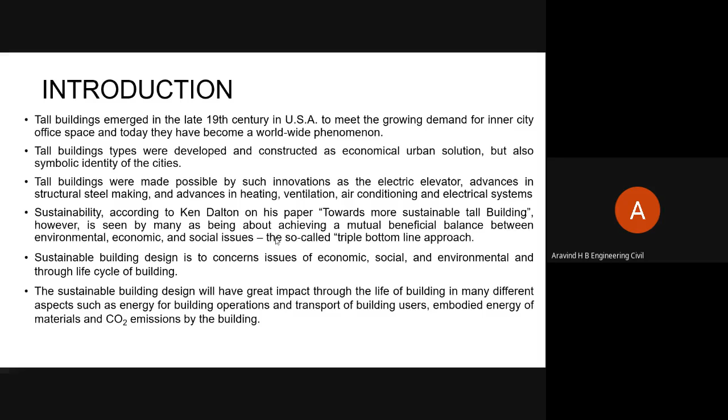Now, we also hear about green buildings, and they're more of a sustainability trend. What exactly is that? Many architects now agree that we are looking at having greener buildings, and even clients agree that they want economical and environment friendly buildings.

And one good thing that has happened now, after a long time, is that the government has relaxed rules so that timber can be used in construction, and farmers can grow timber commercially for this. This is a very important step. If you look through all our ancestors, whatever they have done, they have basically used timber. They were very friendly with nature.

Now we have brought in all kinds of things like steel, concrete. Now we are even going further. We want to bring in all kinds of smart materials also here. So all these things are happening.

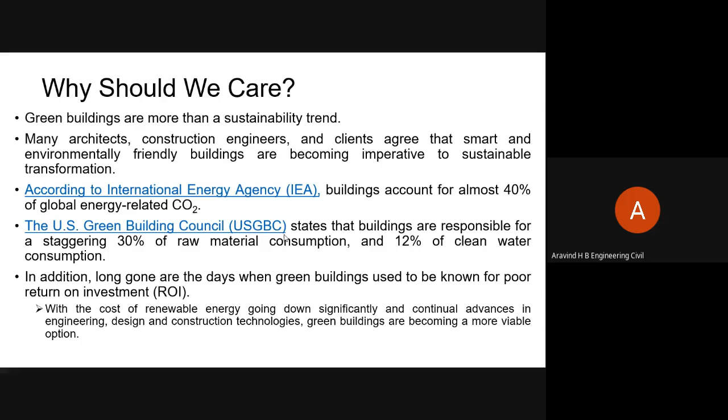So how do we take care of all these things? Say that we want the building to be green, we want it to be sustainable, but at the same time I want to use the latest technology. I want a humidified atmosphere inside my tall building. I want an excellent air conditioning system. I want fast elevators inside. So how is all this possible when you have these constraints?

If I look through this, a simple question: what is a green building? According to the World Green Building Council, it is a building that is designed in its construction and operation to reduce or eliminate negative impact and create a positive impact. Now, if you look through this, you have energy, air quality, material, site, water. All these things are contributing to your development.

And when you are trying to do that, I must not disturb the land, I must not disturb the water body around that. At the same time, I must not play around with the energy around us. So if I have to do that, then I need a healthy, comfortable, durable, energy efficient, environmentally responsible building. I need to look into it from a different angle.

That means I should be efficient in using energy, water, and other resources. Just now, Pravinjit pointed out that the water bills are shooting up. That's what happens when you stay at home with no control on how water is being used. See, even every drop of water matters to us.

Now, look at ourselves. We are now running around to get drinking water. I don't know how long the Kaveri can supply water to the state, to Bangalore city and surrounding areas, because if you really look, the Kaveri has not touched the ocean for a fairly long period. I don't know how many of you are aware of it. About 430 kilometers of that river has dried up.

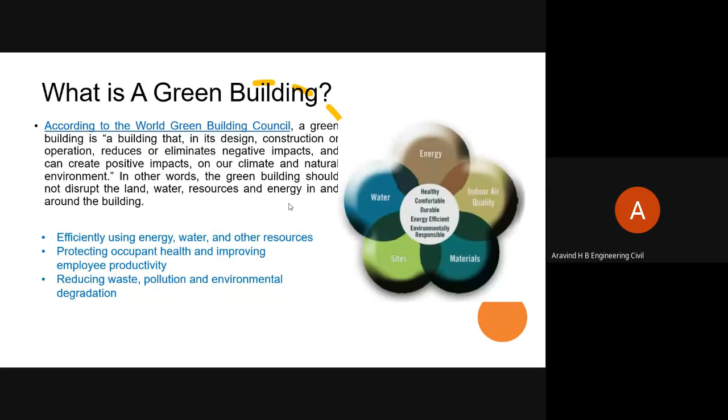So if you look into all these things, then probably you can find a way how best we can reduce the negative impact of whatever we have been doing. That means reducing the waste, trying to bring down the pollution and also trying to reduce the environmental degradation. So what is sustainable development? What exactly does it mean? The Brundtland Commission was the one which gave the meaning for this. It said development that meets the needs of the present without compromising the ability of future generations to meet their own needs. This is a questionable one.

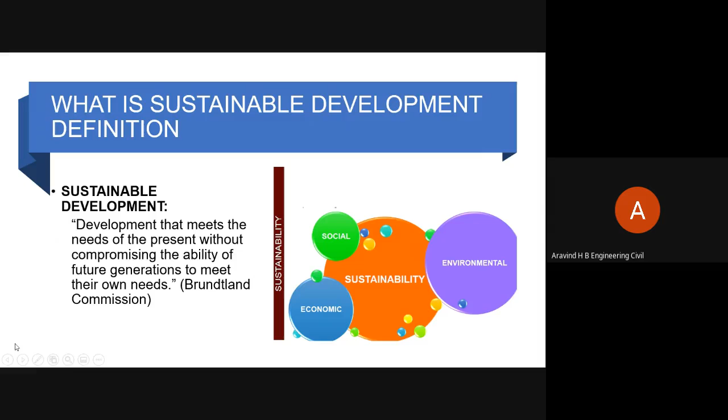If you look through our country, we have already depleted the environment, or we have depleted the natural resources. So our future generation, I don't know what they're going to get. That is what it is. So if you look at it, it has three important factors to it. One is the economic, the other one is social, and the environmental. All these three play a role in making something sustainable. So when we look at it, we have to make sure that anything that we choose will be sustainable.

Now, don't get me wrong, I'm taking steel as one of the things because, when compared to concrete, it's slightly better in terms of being environmentally friendly. So, with steel, 40% of resources come from recycling. The manufacturing conditions, the process, and a controlled environmental impact. Material durability is there, and you have a high recycling rate.

Now, you can ask a question: can concrete not be there? Yes, it is possible, but we have not had any kind of sustainable work in terms of recycling the aggregate, recycling something. Cement, once it is used, I cannot recycle it. It's gone forever. And if I have to produce cement again, I'll be emitting carbon dioxide into the atmosphere.

So if you look at the construction phase, now look at COVID, how you have social restrictions. You need to have a certain distance between the workers. We need to have a certain distance between the engineers and the workers, and you need to maintain a certain distance between all these things. Under such circumstances, probably prefabrication and steel is the solution for us, and what is called off-site manufacture. This is very important. Probably going forward, we may be looking more towards steel and prefabricated structures.

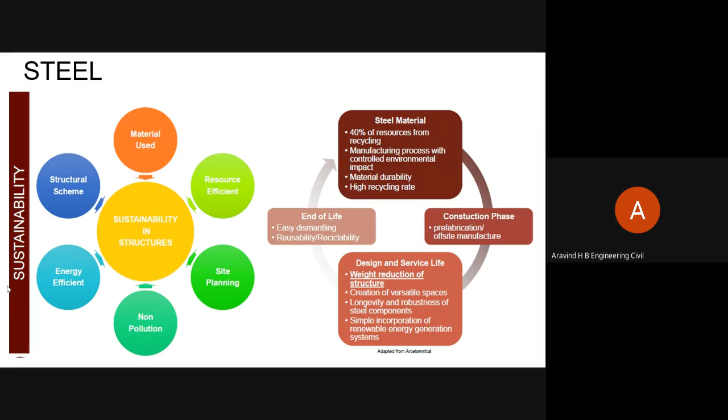Now, at end of life it is easy to dismantle and reuse or recycle. So steel plays an excellent role in sustainability. Now, if I look at the structural scheme, the material used is resource efficient, site planning can be efficient, energy can be used efficiently. I can come up with an excellent structural system for that. It's non-polluting. From all these angles, steel appears to be a good one in the present situation.

Now, when you look at sustainable tall buildings, what are the design criteria that you have for this? There are three heads. We'll discuss them, then we go into different criteria. One is ecological sustainable design. What does it require? It requires a sustainable site, water efficiency, energy and atmosphere, and materials and resources. Then you have economical sustainable design, which is the efficient use of resources and low operating cost. And socio-cultural sustainable design has indoor environmental quality and innovation in the design process.

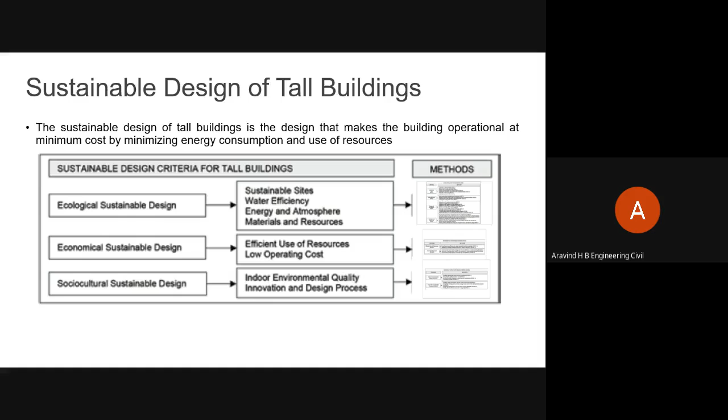Now, if you look at the first one, ecological, what are the design criteria that you have? Sustainable site. I'm going through the basic things. It is protection of the natural habitat, improvement in urban areas, effective use of the construction site, creation of transportation and parking systems, selecting land appropriate for the residential density, protection of fertile soils, reducing the heat island effect. All these things come under sustainable site.

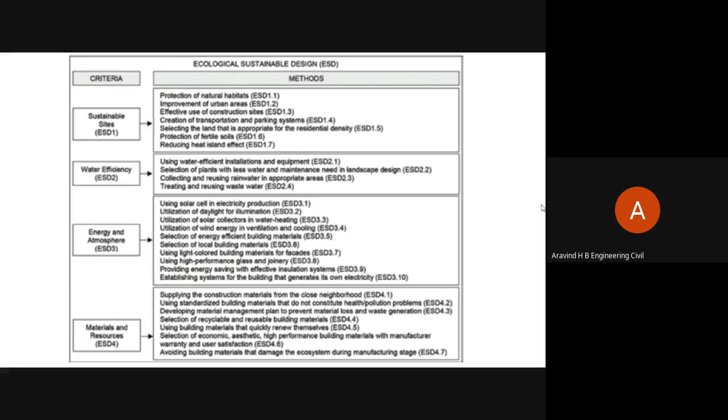Then you have water efficiency. Then you have energy and atmosphere efficiency. Then you have material and resources efficiency. All these things are addressed. So you will have various sources now available to meet your ecological criteria.

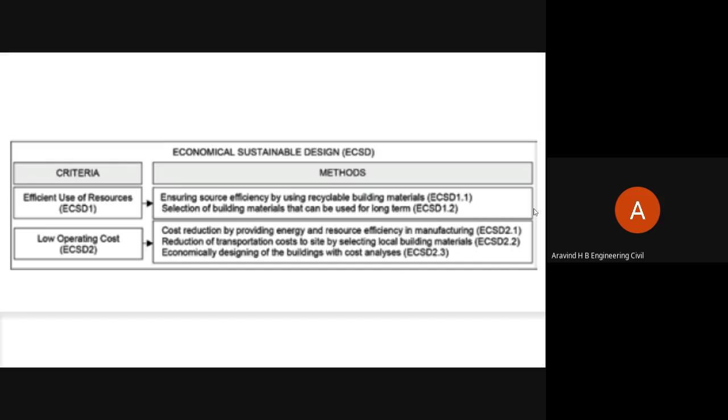Then you also have low operating cost, where you provide energy and resource efficiency in manufacturing, and you have reduction in transportation costs to the site by selecting local building materials, and you're economically designing the building with cost analysis. Then the socio-cultural one, the third criteria: creating the appropriate indoor comfort condition.

If you look at our ancient buildings, or go to any village, or look at the buildings in old areas of Bangalore, some of them are still there. Even my ancestral house is still there. You can see the comfort that you have. We never had a fan or a fridge till 1980 in our house. That's how the interior of the house was. Even in summer, we never felt the heat, and in winter, we never felt it was so cold inside. It was so comfortable. That is indoor condition.

But unfortunately now, with so much development taking place around our house, it's no longer like that. We are forced to use these things. So this is what is changing everything. So then, ensuring the quality of indoor air, yes.

As a child, I do remember the kind of surroundings that we had and the kind of atmosphere we had outside; we used to climb trees, play there, and all sorts of games. But now it is virtually impossible to do that. And we lived with nature. There were a lot of snakes and other animals around. So we were part of it, and every day we used to watch them. That's how it was. We were so friendly with nature, but later on we lost that contact.

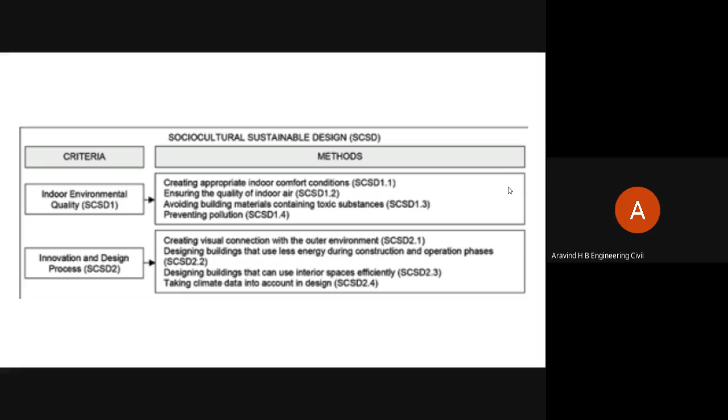But how far are we using it? Now, the question that comes to your mind is, okay, all these things existed. Have we used them anywhere? Is there any tall building which is sustainable or has followed the sustainable design criteria? There are a lot of buildings which have followed this. I have taken two examples. So let me tell you.

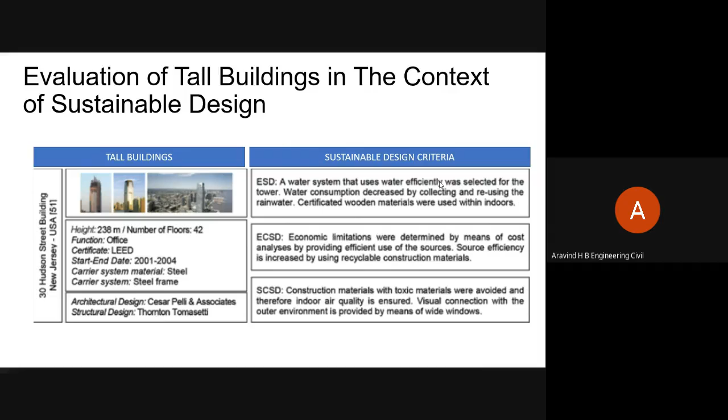Now, is it possible to make every building sustainable? Yes, it is possible. All tall buildings can be made sustainable. Now, let's go through the challenges of Taipei 101.

Till Burj Dubai was built, this was the tallest structure. This is in Xinyi district of Taipei, and this is owned by Taipei Financial Center. It has a multi-level shopping mall adjoining the tower that houses hundreds of stores, restaurants, and clubs. Now, if you look through this, the social environment of this, it has a mall, it has houses, stores, restaurants,

and clubs. You have water consumption, then you need to have some kind of an air conditioning system inside, and also you need to have some way to see that the atmosphere within that is suitable for the human environment. So automatically your sustainability comes into play. What did we do here?

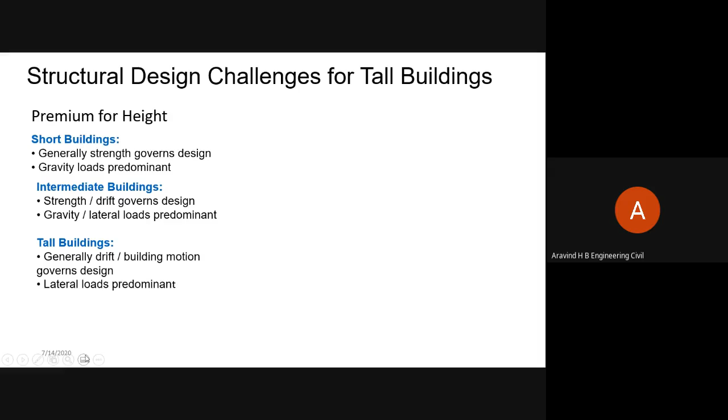First, for a short building, if you look at the structural design aspect of it, generally your strength governs the design, and gravity load is predominant. When it comes to the intermediate one, your strength and drift govern, and gravity and the lateral loads also to a certain extent. But when the building becomes tall, drift, the building motion, governs the design, and lateral load becomes predominant.

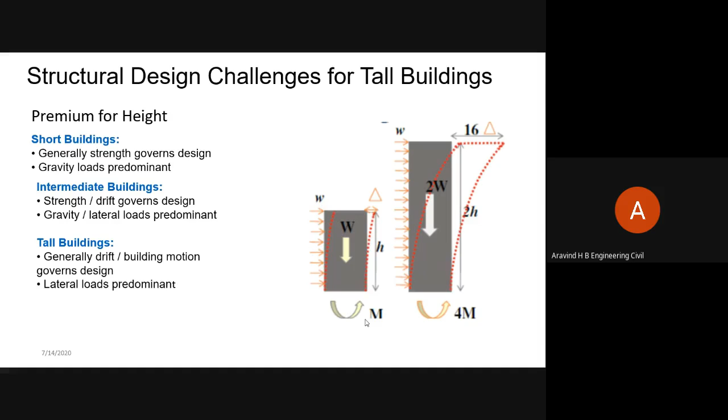So I can just give a simple example here. I just have a height of the building H. Weight is W. It has some wind forces acting on it, and there is some base moment. Now, if I double the height, I can see that the drift is multiplied almost 16 times, and your base moment increases almost 4 times. So you can see the impact of the height of the structure on the base moment as well as the drift.

So height was the major factor that we had here. When we started the design, it was not supposed to be a tall building. What was needed was to support the floors, shafts for the elevators, space, stairwell space, space for mechanical, electrical, plumbing, and fire, etc.

Now, what happened was when the Petronas was built, the people at Taipei Financial Center said, why not make this also tall? Once you have to make it tall, your economic height is decided by the rent that you get out of the floor. That means the rent of the added floor should be greater than the cost of the added floor.

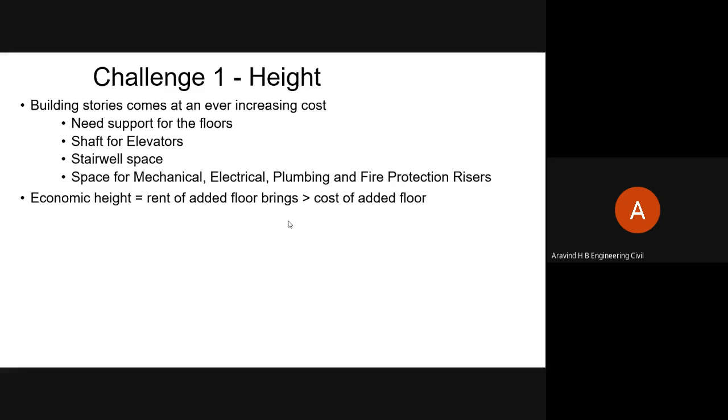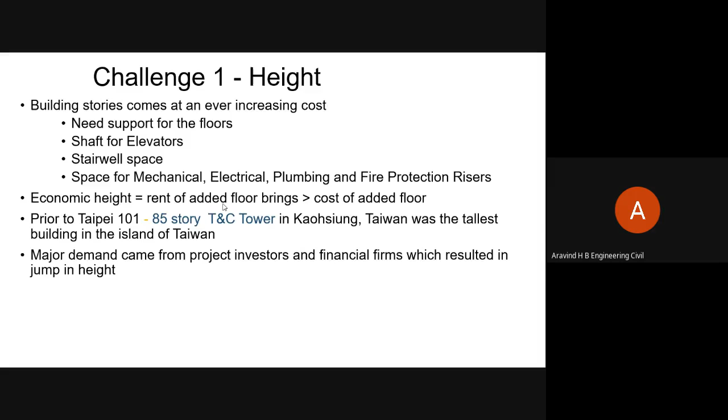Also in Kaohsiung in Taiwan, that's another town, there is the 85-story T&C Tower that was the tallest building on the island of Taiwan. Now, the major demand from the project investor was that they wanted this to be the tallest building in the world. So its height got increased. And the projected office space was 200,000 square meters, and based on the individual floor area and general office layout as per the standard, that led to the 101.

Now, this is generally what happens in design. When you're doing something, something else gets added on because somebody gets the idea, why not make it this way, and somehow finds an investment for that. So what happens is your criteria will change. Now, how are we going to address this?

The height has increased, and this region is prone to typhoons, this region is prone to earthquakes. At the same time, I have to keep all the other costs within reasonable limits, and at the same time meet the standards of LEED. What to do?

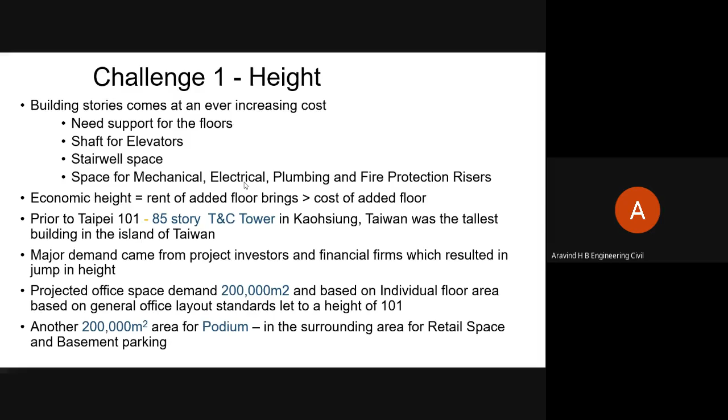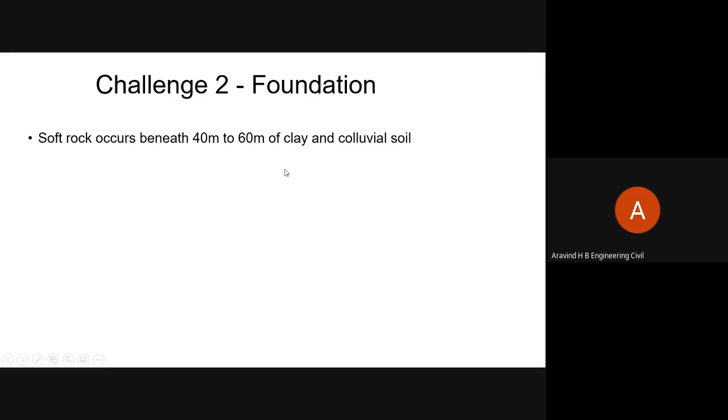So they added another 200,000 square meter area for the podium surrounding the retail space and the basement parking. Next, the second challenge was the foundation. There is soft rock beneath 40 to 60 meters of clay and colluvial soil. Groundwater is 2 meters below grade, and an extensive investigation was carried out by Sino Geotechnology, based in

Taipei. So based on that, we said we'll have a slurry wall, 1.2 meters thick, surrounding both towers and the podium. It's 47 meters in depth, cuts off the groundwater and provides embedment varying from 21.8 to 23.5 meters. Each podium column bears a single 2 meter diameter drilled pier socket, 5 to 28 meters deep. The podium slab has the buoyancy effect, so to prevent that we have the necessary dead load on it. That's the way the podium slab is resting. I'm not getting into too much detail on the foundation aspect.

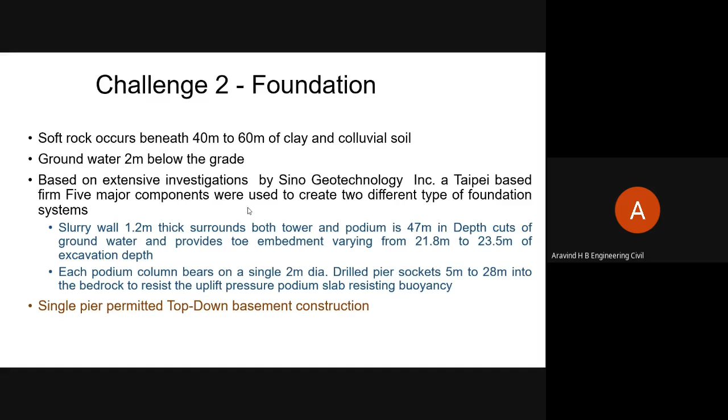Next, we have a single pier that permitted top-down basement construction. I hope you know what top-down basement construction is. Top-down means I don't start from the foundation. I start from the roof, then I go down, and finally I build the foundation. What was the advantage of this? The mall could be opened much earlier than the tower, so that the investors can get a certain amount of revenue from the mall. That's the reason why we resorted to top-down construction.

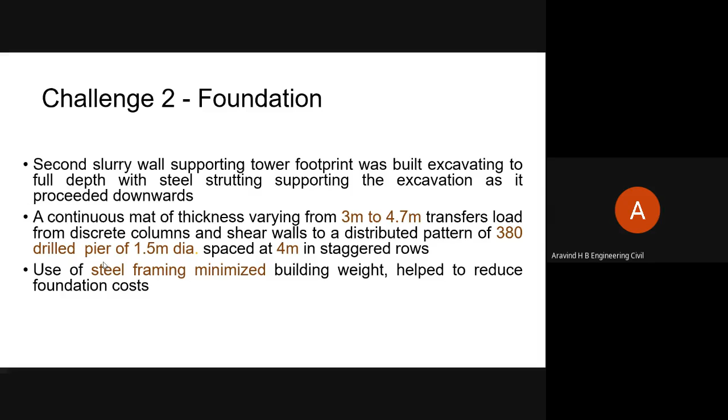And then you have a mat thickness varying from 3 to 4.7 meters that transfers the load from the discrete columns and the shear wall to the distributed pattern of 380 drilled piers of 1.5 meter diameter, spaced 4 meters in a staggered row. We have used steel as the main frame system, but we have used concrete also within this; it's a composite construction. The advantage is that the cast floor braced the perimeter wall, and the story excavation was carried out beneath the slab while the superstructure framing was erected above the slab at the same time. So both works could go on simultaneously.

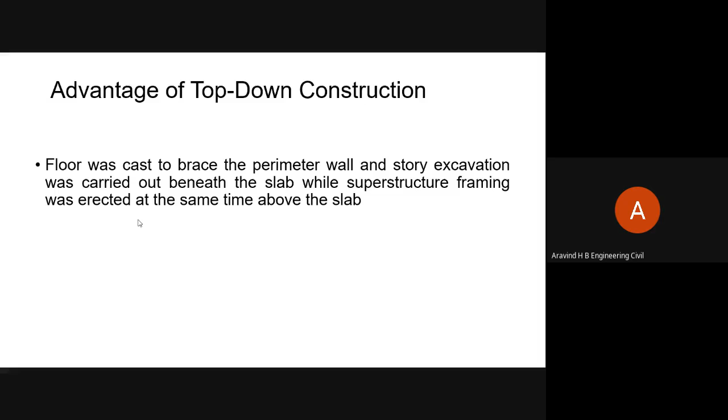Now, as I said earlier, steel always comes from a shop, cut to size, already machined. It comes from the fabricator shop, is brought here, and is assembled here. So the construction would be faster. Second, the podium could be opened a year before the tower so that the space is available for them to rent out and earn on their investments.

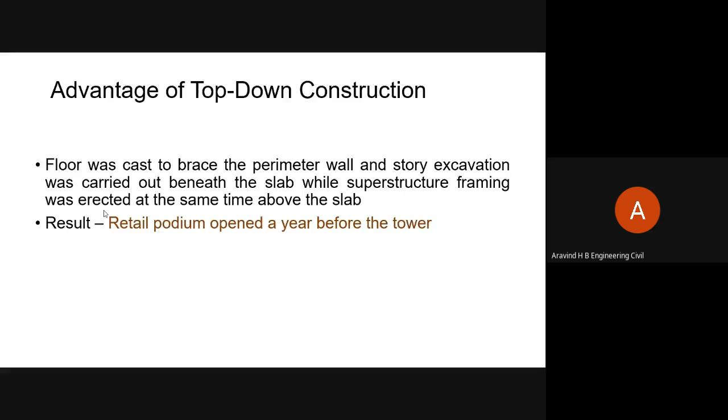Next was the tower shape. C.Y. Lee is the architect, and he is very well experienced in designing tall towers. He came up with the shape of a pagoda, something which has a narrower base and a wider top, with repeating modules. 8 is a very auspicious number for the Chinese, so everything was at 8 floors or 8 modules. It's a homonym with wealth. That's the reason why it has 8 modules.

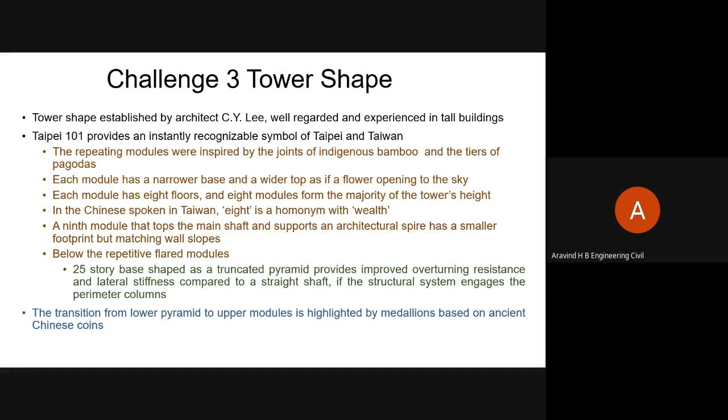The 9th is the top shaft, an architectural spire, and below that there are repeated flared modules. The 25-story base is a truncated pyramid that provides stabilizing, improved overturning resistance and lateral stiffness compared to a straight shaft. That's why we went for a pyramidal base, and it engages the perimeter columns. Also, the transition from the lower pyramid to the upper module is highlighted by the medallion, a representation of the ancient Chinese coin.

It provides large foliage during its growing life and is quite strong with predictable support. From this we got an idea, and we noticed that bamboo is able to sustain typhoon and behave very effectively and efficiently against lateral load.

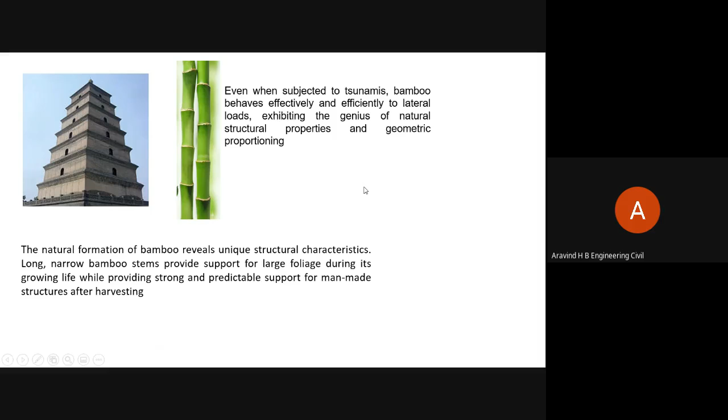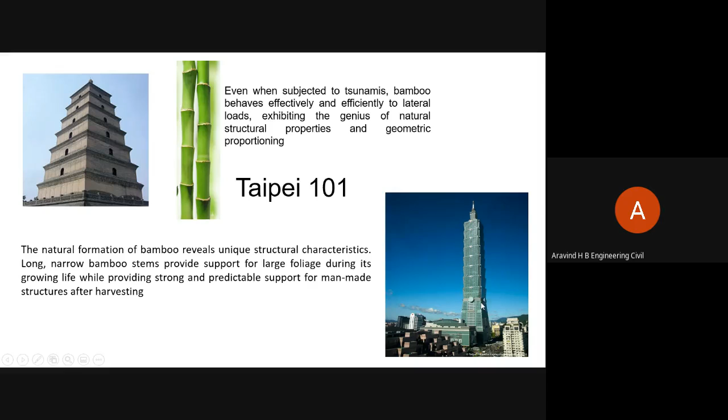So the final configuration of the tower is decided based on the wind tunnel test. Over this you have a spire going up, and below that you have 25 stories. This is the pyramid, a truncated pyramid.

Now, if you look at the wind, it has static, dynamic, and aerodynamic effects. In case of a tall building, in addition to the static, we need to consider both dynamic and aerodynamic effects, and these play a major role.

So to understand the behavior of the structure, I need to know fluid mechanics and structural mechanics, because there is an interaction between the two in the wind flow. That's why we carry out the wind tunnel test, to understand what kind of flow is there around the shape we have generated. Based on the wind tunnel test, we can modify the shape.

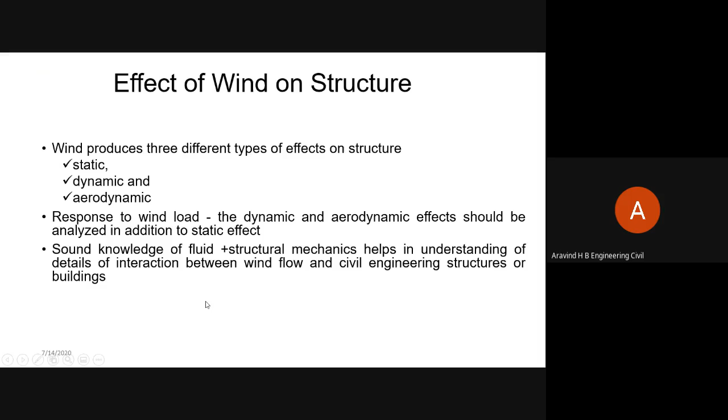As you know, the taller the building gets, the more the dynamic response starts to dictate your design. If you have a load, it can be broken down into two components: one is a static component, the other is a dynamic component.

That depends on the frequency of this fluctuating component. If the frequency of this fluctuating component coincides with the natural frequency of the structure, it can get into resonance, so we have to be careful analyzing this. We need to analyze both across and along wind effects, that is, the yawing moment also has to be taken into account.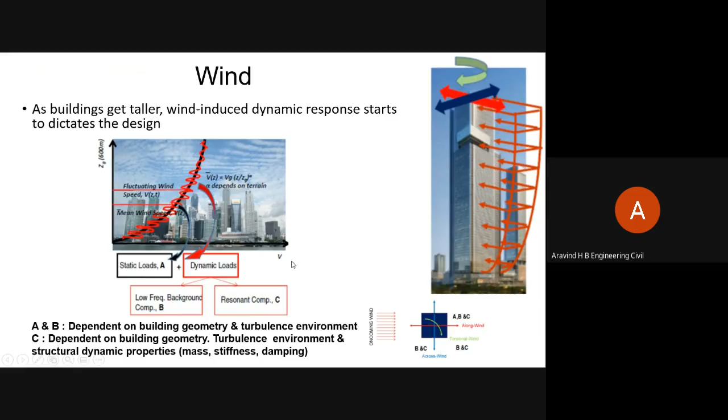Okay, how do I counter the wind? Probably you would have seen a coconut tree swaying in the wind. It sways, then comes back, and sways again in the other direction. That is because of the vortex shedding that happens around the coconut tree.

Skyscrapers also experience the same alternating crosswind forces due to vortex shedding. The wind passing through the object separates from the side face, creating alternating whirlpools that exert a difference in pressure on the building, making it sway. Pressure on one side will be lower and on the other side higher, which makes the building sway in a particular direction.

In Taiwan, the typhoon of a 100-year return period brings 43.3 meters per second, or 97 miles per hour, averaged over 10 minutes at a height of 10 meters. This can be similar to a 3-second gust of 67 meters per second, or 150 miles per hour. That is the typhoon you can expect here, which can excite a skyscraper, and the crosswind forces become much greater than normally used for design.

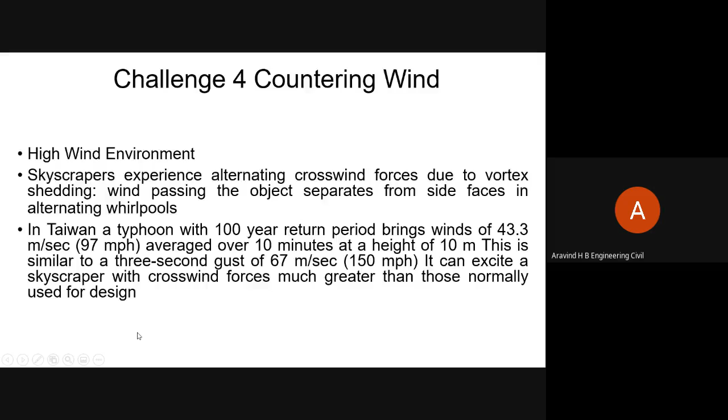So how do we minimize the effect of crosswind? There are several approaches. One is orientation, then you can create a setback and a varying cross section. This is what we have done in Burj Dubai.

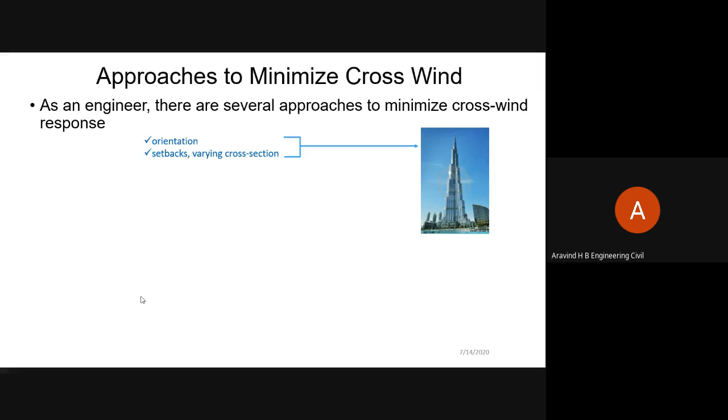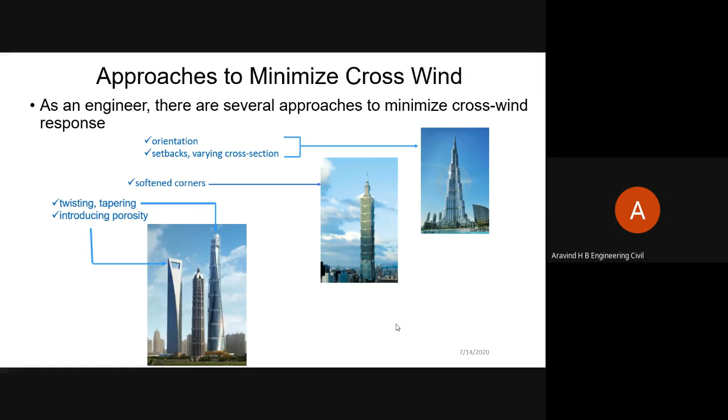You can also create a twisting structure and introduce porosity so that the vortex effect can be reduced. The other approach is having a softened corner, as in Taipei. These are some of the approaches generally adopted to minimize crosswind effects.

This is a wind tunnel test where a crosswind around the chamfered 45-degree corner reduces the lateral response. You can see this was the earlier response, and subsequently how the moment got reduced at the base. This effect is because of having a saw tooth or double-notch corner, which brought a dramatic reduction in the wind moment. That's how the shape got changed to this, with the double-edged notch here.

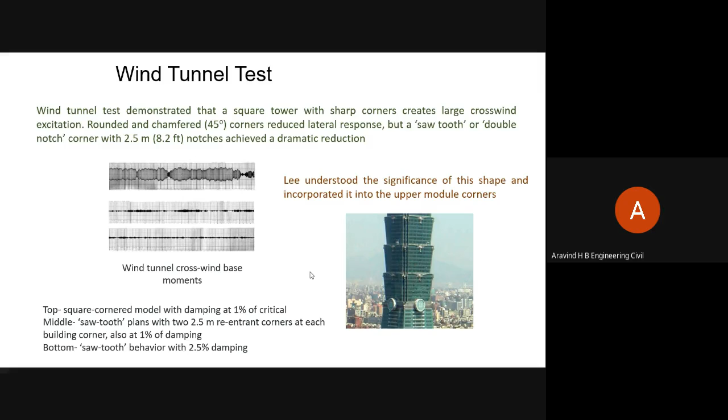The damping was about 1% of critical, with sawtooth plans and 2.5 meter re-entrant corners at each corner. With this, you could bring down the base moment.

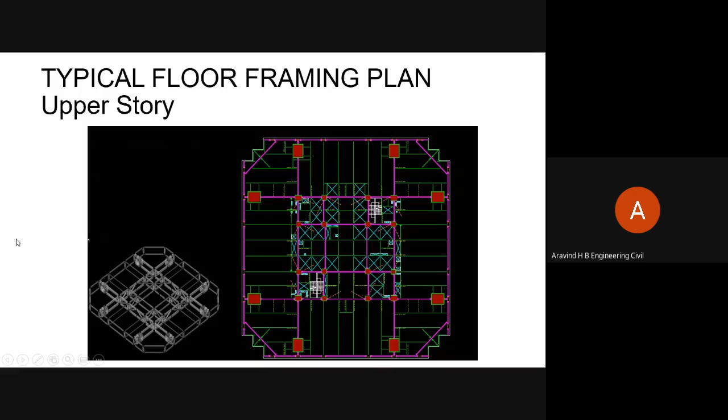This is the typical framing plan of the lower story, and this is the framing plan of the upper story. This is the mechanical floor. You have the outrigger here.

There are different structural systems that can be used for a tall structure. The outrigger is one of them, there are others too. These outriggers are tied by the belt truss, a truss that runs around like a belt, tying everything together.

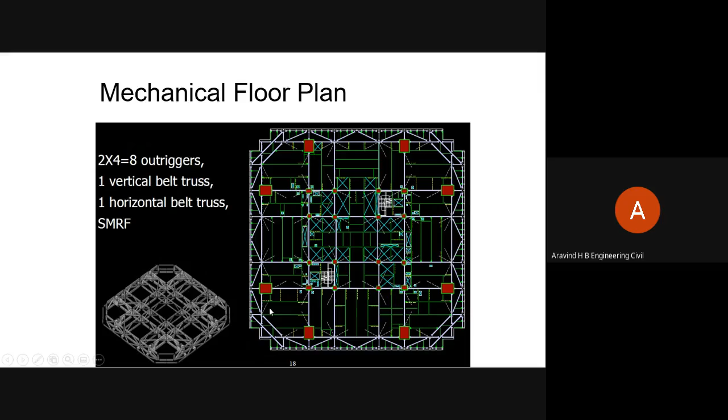If you count, there are 1, 2, 3, 4, 5, 6, 7, 8 columns here. This is called the super column. The entire structure is carried by these super columns, because 8 is a very holy number for the Chinese, especially Taiwanese, so they wanted everything in terms of 8.

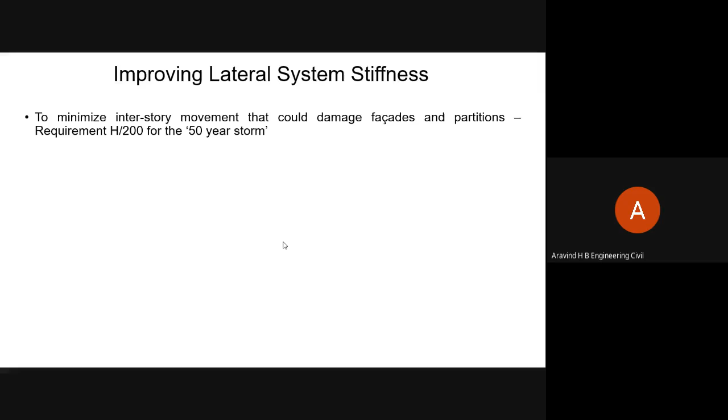To minimize the interstory drift that could damage the cladding and partitions, the requirement was H by 200 for a 50-year storm.

A large portion of the tower drift was created by the overturning rotation of the lower stories, so we had to control it by increasing the column stiffness. The hollow columns were filled with high strength concrete and adopted as the core and the super column. So the super columns are steel boxes built up to level 90.

The steel plates are 50 to 80 mm thick with full penetration welds. The box straps resist bulging, and rebar strengthens the concrete. This box core, the super column filled with concrete, has a strength of 69,000 kPa, with extra stiffness needed at the bottom, at the basement level up to level 62.

This is again determined based on dynamic studies, to decide whether to increase the stiffness or the mass. But if I increase the mass, I'll increase the seismic forces, so I can't play around much there. By increasing the stiffness, I automatically increase the weight of the structure too. But I can arrive at a compromise: increase the stiffness to a certain extent, then beyond that use some other device to absorb the energy of the wind or the earthquake.

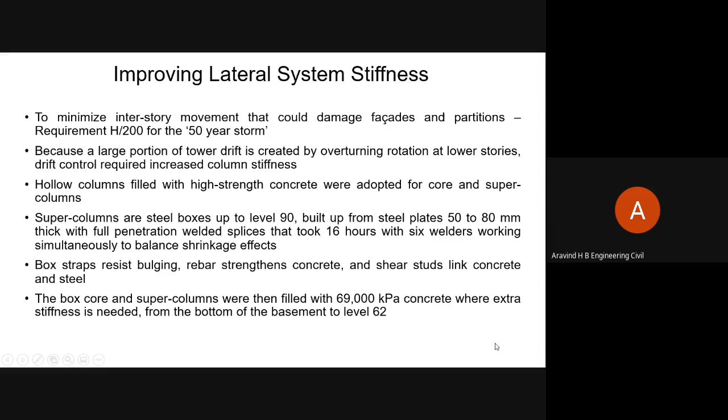So we'll see how this was done. This is a section of the super column. It has a certain stiffness, and you can see the rebars coming out of it.

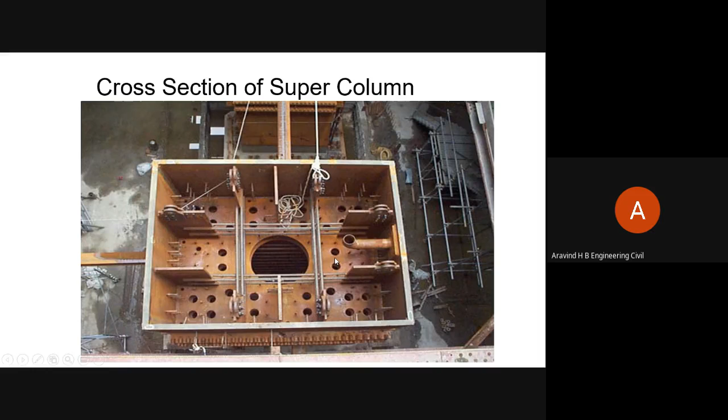Now, for the structural system, for wind I need a stiff structure to reduce the drift. But if I increase that, I increase the seismic forces acting on it, so I need to find a balance. That means I need to check for seismic ductility as well as seismic strength.

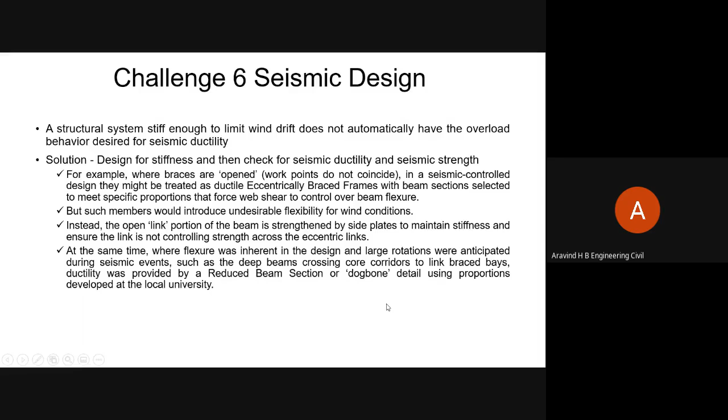Next is occupant comfort, something you probably won't study in a regular building. What happens is that as wind at the height of the tower increases, the upper portion tends to accelerate, and when this happens, people inside feel very uncomfortable. So somehow this acceleration has to be reduced.

This is needed for occupant comfort because steel, being flexible, tends to drift and has very low inherent damping, about 1% of critical, under a moderate windstorm. With cyclic wind excitation, this can build up over time, leading to acceleration of the upper floors that can reach a very uncomfortable level, so much so that occupants may not want to stay there at all.

So some kind of damping is required to remove this kind of energy that is induced into the structure through the wind.

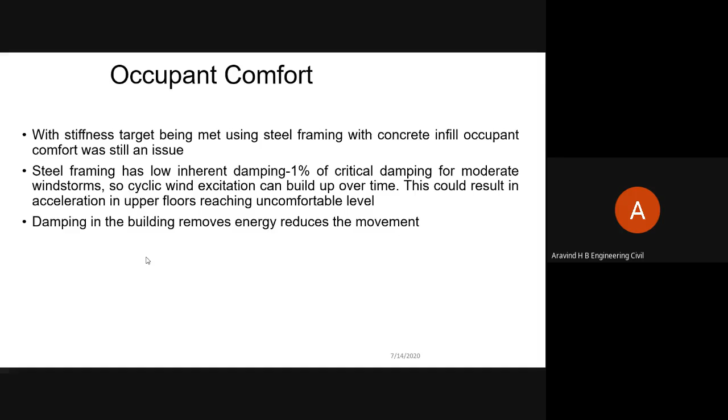The site where Taipei 101 is built is about 200 meters from the major fault line, so it's prone to fierce wind and strong earthquakes. We need to take both into account. It has to be flexible in strong earthquakes yet remain rigid enough to prevent large side sway movement.

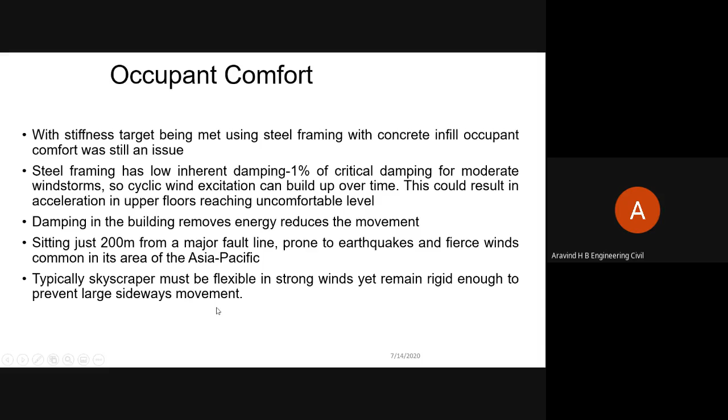How are we going to accomplish this? What is the solution? I can't make it flexible because the building will accelerate and it may even break the glasses, the curtain walls, and other features.

Most designs enlarge critical structural elements such as bracing, but the height of Taipei 101 combined with the demands of its environment call for additional innovation. This is exactly where sustainability comes in. I can't just keep increasing the space to do that, so I have to look at this aspect differently. How do I do this?

Take an example of a simple swing. What happens now? This swing will keep on swinging. It will tend to twist because of the tree, depending on the motion we give it, it can also twist. The same thing will happen in the case of a building.

Now, if I push the swing, what happens? It keeps swinging, and over a period of time it comes to a stop. What makes it stop? That is because of the friction between the rope and the branch of the tree.

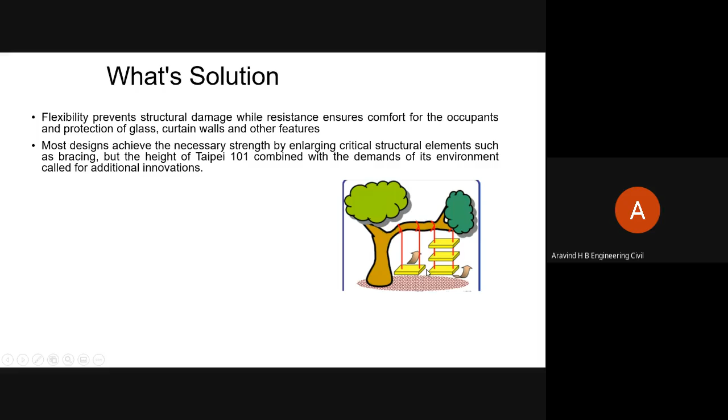Now, if the weights are all equal, it may probably swing straight. If they're not equal, it can also twist — it may not go in a straight line, but as shown by the arrow, it may twist. The same thing can happen to a building.

So to achieve stability under violent motion, we have to design a gigantic tuned mass damper. That damper is 5.5 meters across — a sphere of 5.5 meters — weighing about 728 tons, suspended from the 92nd floor to the 87th floor.

This was designed by Motioneering of Guelph, Ontario, specialists in this field, and it was done as a passive damping system. There are two kinds of damping systems: one is active, another is passive, and another is a hybrid combination of active and passive.

An active system requires an external source of energy to activate it — that's what is called active. A passive one utilizes the energy supplied to it by wind or seismic force and gets activated by that. The hybrid one is a combination of active and passive. We see this more often in structural controls.

During design wind events such as a typhoon, the amount of energy dissipated is so large that accommodating it within the design is uneconomical — very difficult. Similarly, if I have to design the structural system for the maximum intensity of earthquake, the structure becomes very huge, which also becomes uneconomical. So either way, I cannot accommodate that.

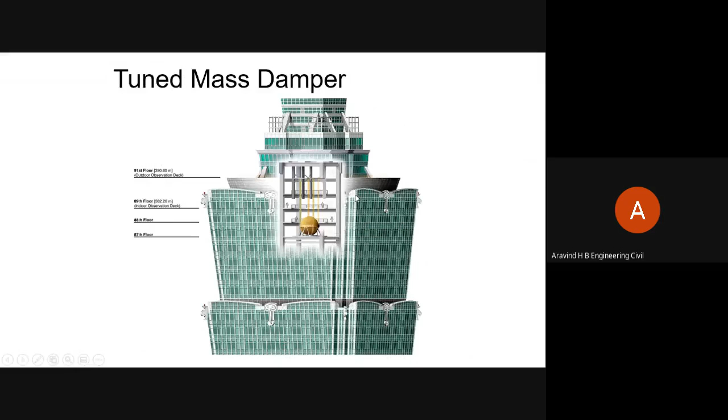Now you can see the chamfered corners of the building — this reduces the base moment, so by altering this we could achieve that. This is a truncated pyramid shape — you can see it's broader at the top, narrower at the bottom. That's the damper.

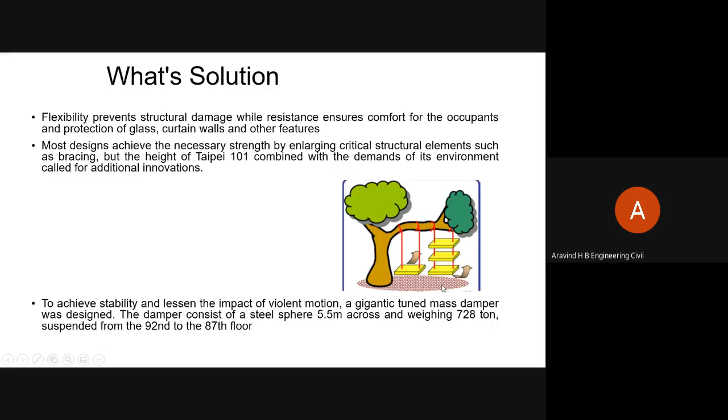So you can see the damper. This is 708 tons. If you include all the other accessories, it comes to 728 tons. It is suspended by 8 steel cables, and then these are 8 viscous dampers that act like shock absorbers there. And the ball can move 1.5 meters in any direction and reduce the sway by 40%.

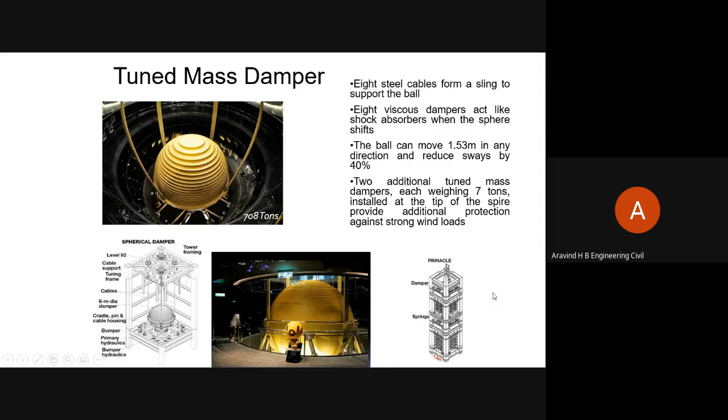2 additional tuned mass dampers, each weighing 7 tons, are installed at the tip of the spire, as you see at the top, to provide additional protection against the strong winds. So this is how your damper looks. So the pinnacle that you have on the top is also subjected to fluctuating wind. So it's likely to undergo fatigue.

So the first 3 modes that we identified are potentially creating significant stress during the storm. So we had to absorb the energy during that. So the dampers that we used were to absorb the stresses during the lower one. The disadvantage of the passive damper is I can tune it to one particular frequency. That means I will take the critical one and tune it for that.

Whereas in the case of an active one, because I'm applying an external force, I can tune it the way I want. There is a difference between the two. So in most of the cases, what we have used here is a passive damper.

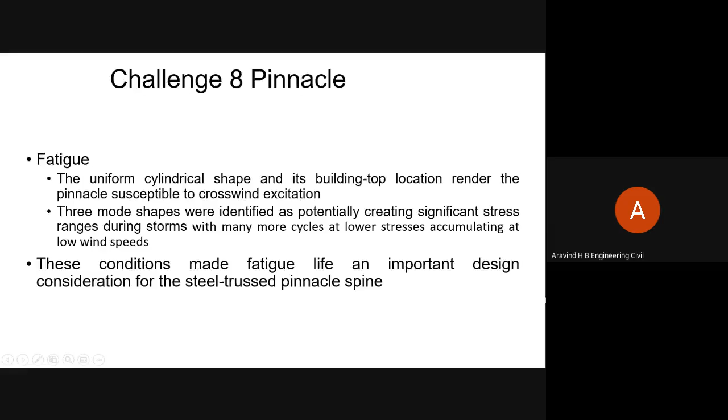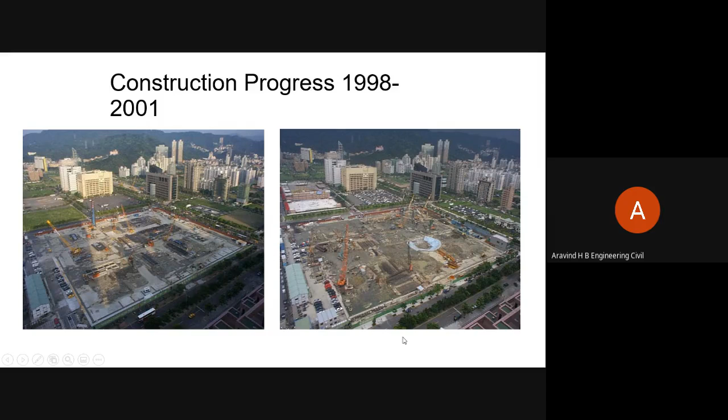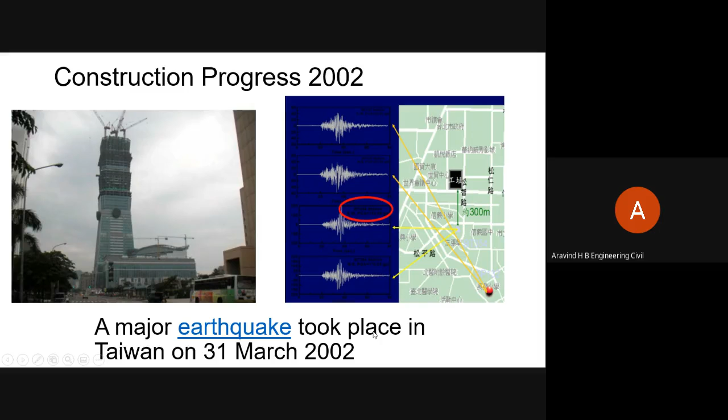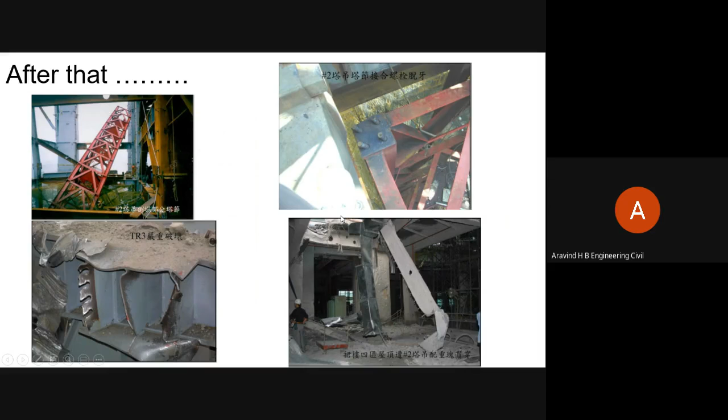But the only thing that happened was damage to the upper portion of the structure here. This could be rectified. So this is how it was designed, that if it happens, certain portions get blown off, and you can come and replace them. So what you see is the damaged portion of the structure.

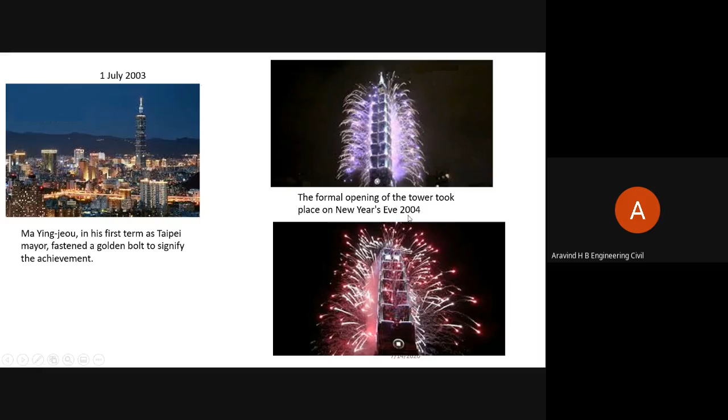Next, after this, it was opened in the year 2004 with a formal opening, but earlier it was opened on July 1st, 2003 by the mayor of Taipei. That's the reason why we say the period is from 1999 to 2004, formally opened in 2004 on New Year's Eve.

It was designed for a wind gust speed of 135 miles per hour. Now the typhoon that hit was close to that, about 138 miles per hour. The whole tuned mass damper started swinging, absorbing that energy. This is what we call supplementary damping.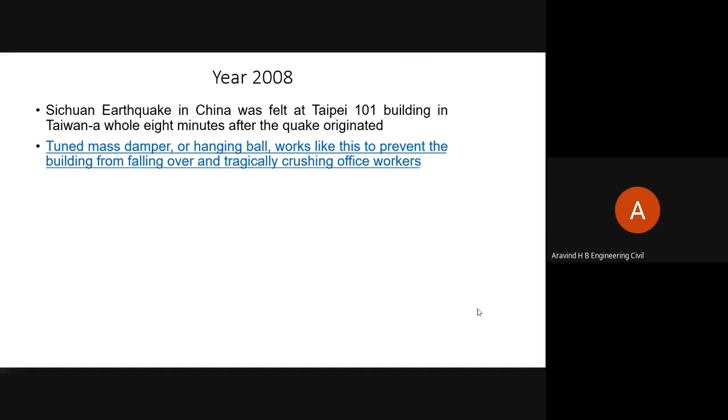That means I don't have the necessary damping within my structural elements. I add something to it so that this will be a shock absorber for my building, which protects my main primary frame. So this is about it.

Understand one thing, the road to success is never straight and smooth. All it requires is the courage and the attitude to overcome the obstacle. The supreme art of the teacher is to awaken a joy in the creative expression of the knowledge. This I learned from this great gentleman, Sadhguru. Only those who dare to fail greatly can achieve greatly. This is what Robert F. Kennedy said.